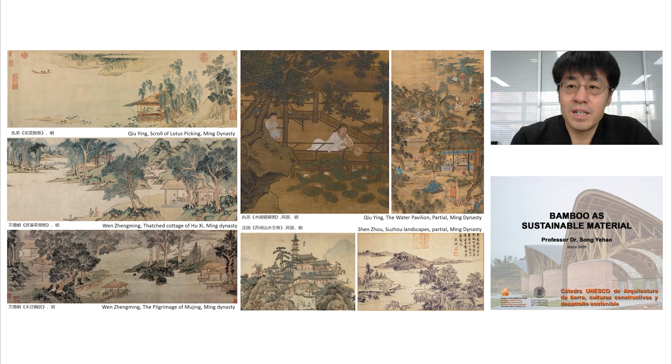Bamboo is very popular around the world. And also for the traditional Chinese, bamboo has very particular meanings, especially for ancient literates. Bamboo sometimes means the virtue of literates. And also we could see some very interesting sceneries in traditional Chinese painting that in old time the envelope of buildings are not so much necessary. The traditional Chinese were fond of the way living together with nature, with openings.

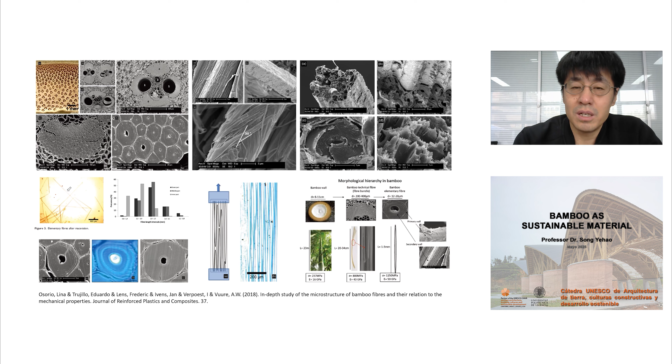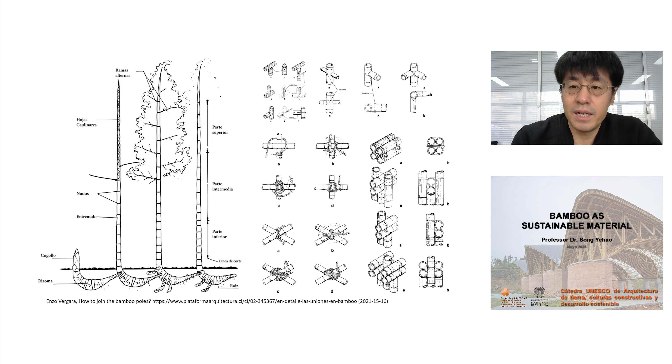The interesting part is all around the world, the traditional way to deal with bamboo as construction material is something in common. People are very likely to use rope to bond different pieces together. Rope plays an important role for bamboo architecture. And also with steel bolts, with help of that, makes it possible to make architecture with bamboo.

And these four pictures show the different stages of my office to use bamboo as architectural material. From 2017 the Village Lounge of Shangcun, and then to the Swirling Cloud in Beijing, and also the tea leaf market of Zhuguanlong in Fujian province, and also the bamboo pavilion for the INBAR organization, International Bamboo and Rattan. And four different stages tell a way of making full use of bamboo as construction material.

From the very beginning with a modular way, because at the very beginning we were not so much familiar with bamboo. We did not so much understand this material, how it could be part of architecture. So we made it modular, so we made something rapidly, six units. And in the Beijing case, we tried to challenge the extreme of bamboo. And also we just focused on the light-weighted structure system with bamboo.

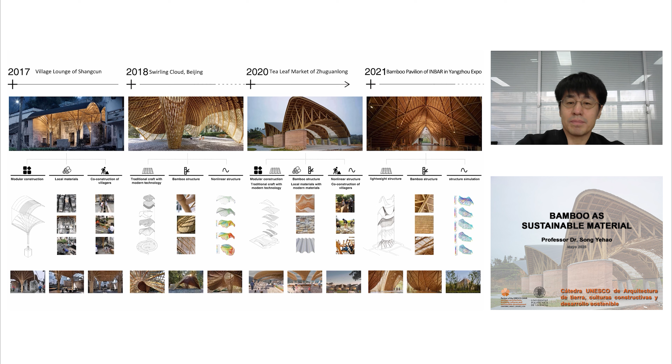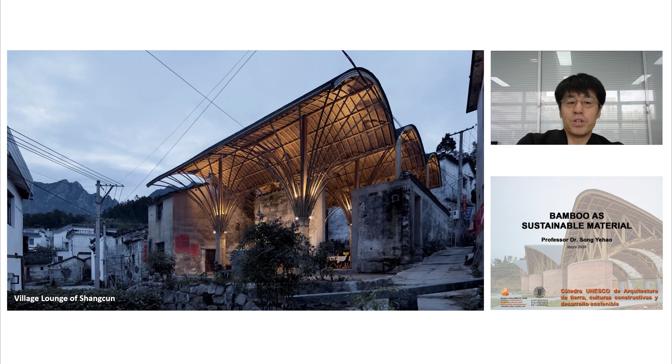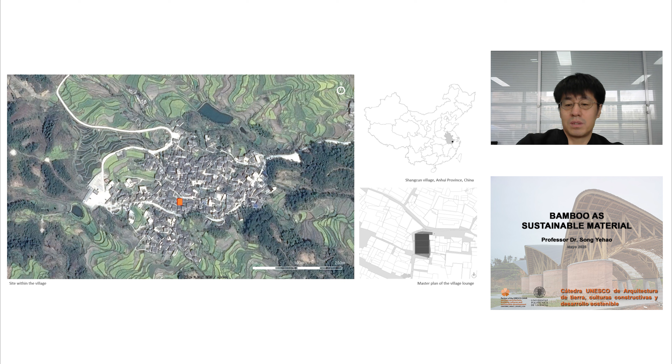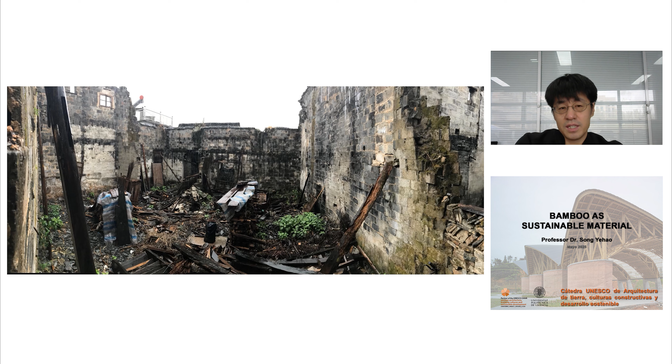At the very beginning, the site is kind of abandoned. The traditional courtyard residential unit, very common in that region, abandoned for two decades and turned to be like that. And after the input of the bamboo architecture, the abandoned place turned to be a new center of the village. There are a lot more contrast, big contrast.

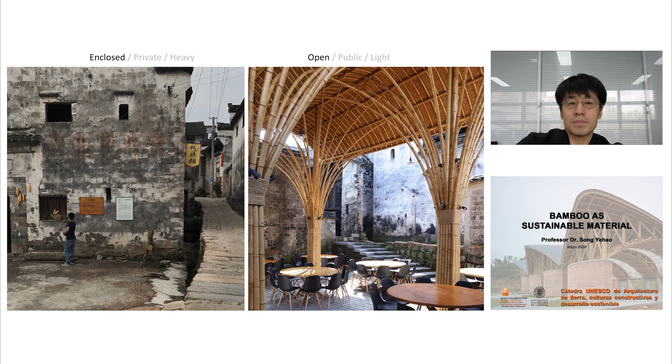The original residential units in that region, called Hui-style residential blocks, were something enclosed. And the village lounge, for sure, is open, not only to the villagers, but also to the tourists, to have the tourists understand what's happening around them. And also for the villagers, they got a place to talk with each other, to communicate, and to share something together. So it's open. And from private, turned to be public. From the private house, residential function, to public, open to all villagers and tourists.

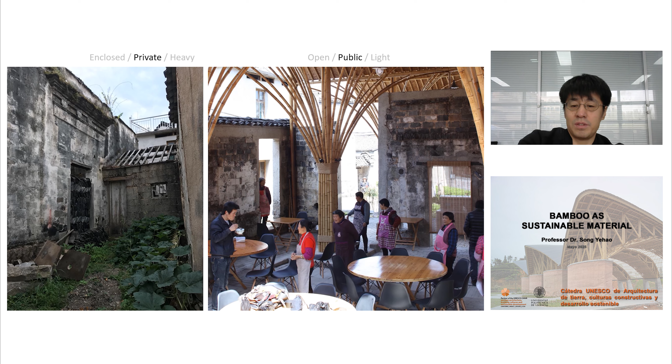And also from the heavy brick work to light-weighted bamboo structure, not only the material, but also the color, from dark gray to light yellow and brown.

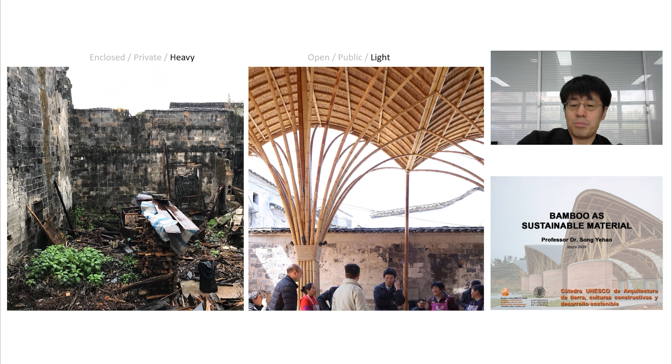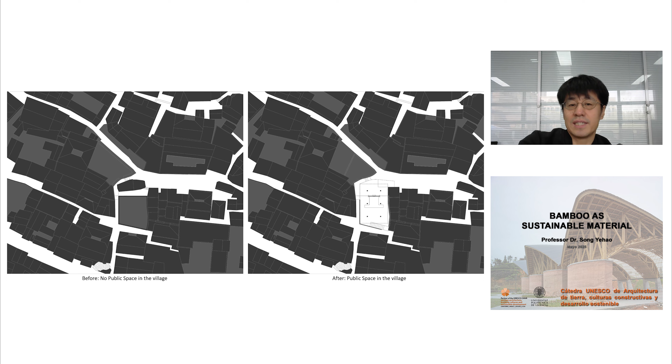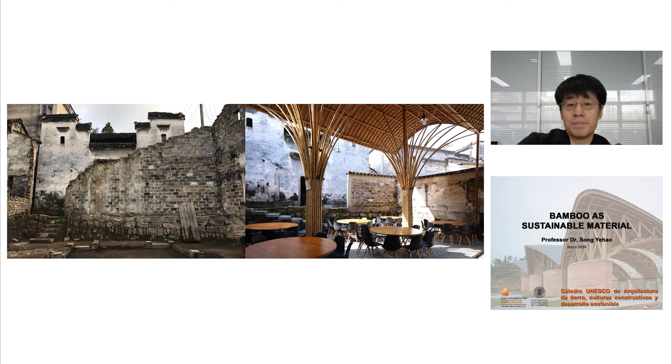So before that, actually no public space in the village. And after that, one center established in that village. So before that, it's kind of a ruined private courtyard house. Afterwards, the renovated new public space for local people and for tourists. We could see the contrast: abandoned place to a new village center. Abandoned, and for the local people.

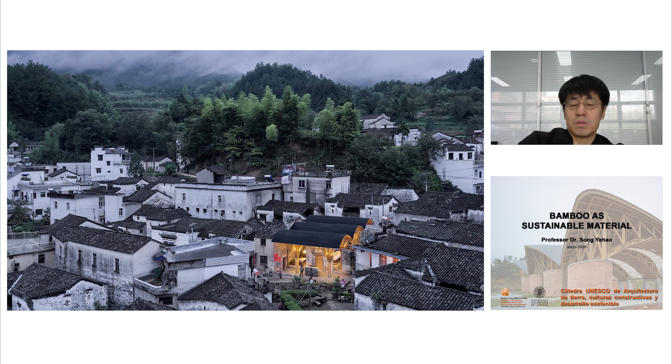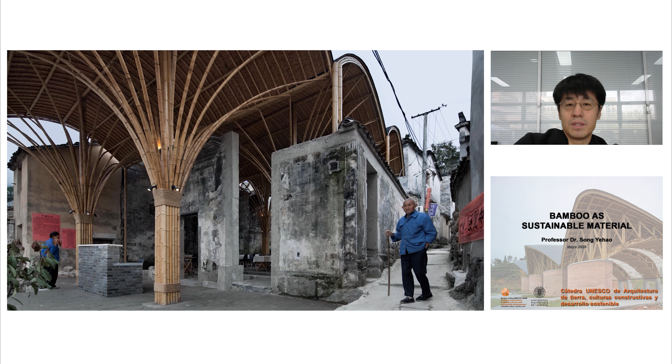Because this architecture was made of bamboo, it's really something new in that village. Also, as I mentioned before, the Chinese ancient or traditional literati valued very much the spirit of bamboo as a virtue of gentlemen, but still very few cases show in architecture people just made with bamboo. We just try to make it modular. 6 umbrellas make the village center. That's in the daily life, the village life.

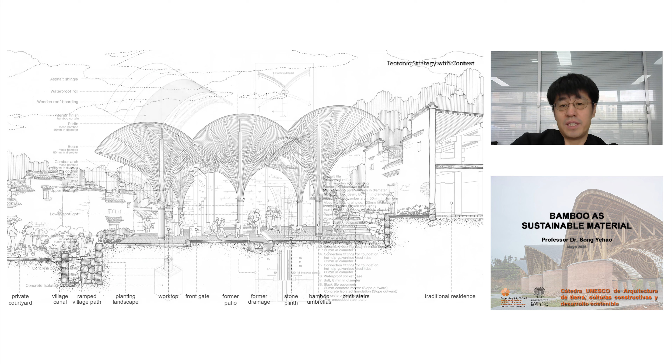The section shows the terrain and also the surroundings. It's something new for sure, but it blends very well with the surroundings, not only because of the terrain, of the shape, of the 6 umbrellas with different heights, but also we retrofitted the whole courtyard system, which is quite famous for the sewage system. That's detailing, bonded with rope, helped with steel bolts, and also with a lightweight concrete base. We just make the whole system.

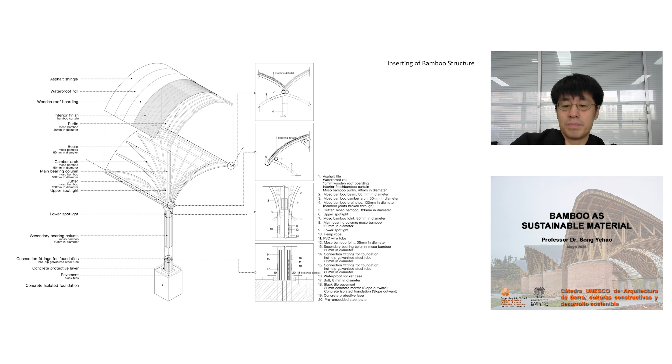People in green t-shirts are professional bamboo workers. Before that, actually, they are also farmers. They are working as the villagers. And just because their hometown is rich in bamboo, and the bamboo industry grows in that region, they just turned from farmers to bamboo workers, professional bamboo workers. And from my point of view, the biggest advantage of bamboo as construction material is it's lightweight, very easy to handle, to deal with, and almost the on-site work is not a challenge.

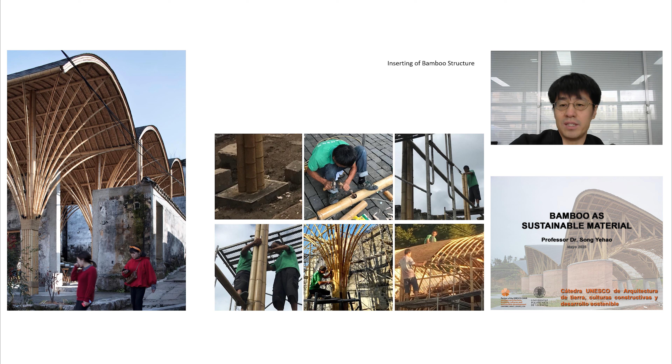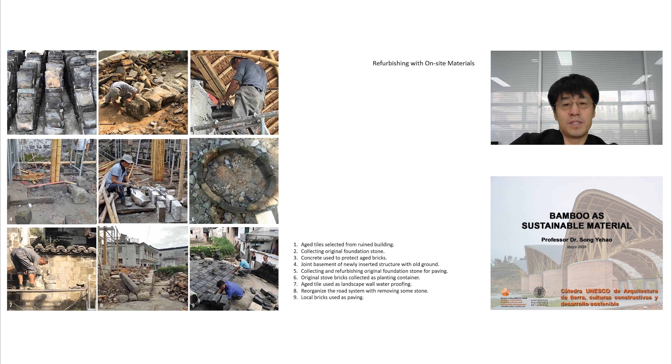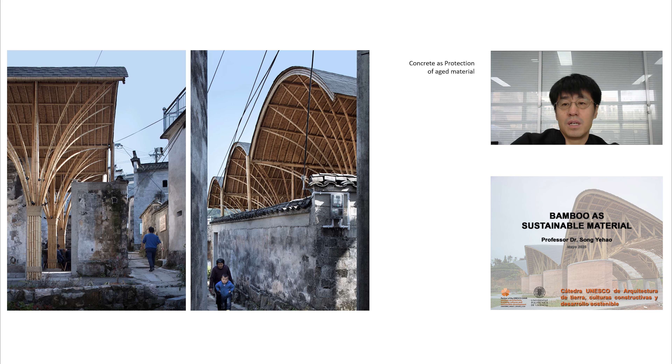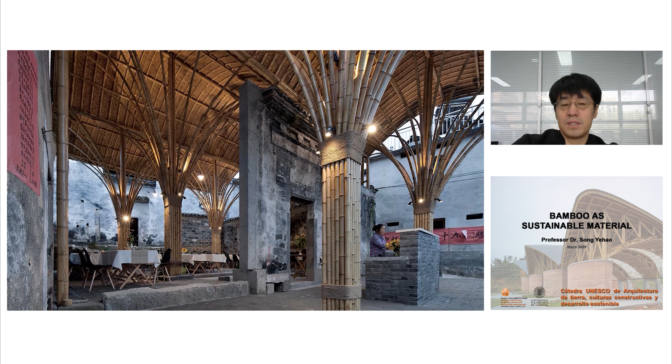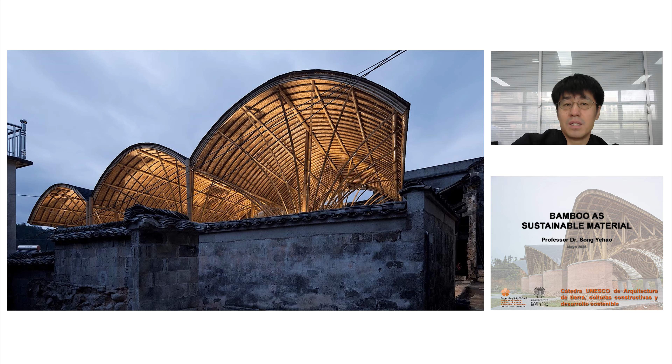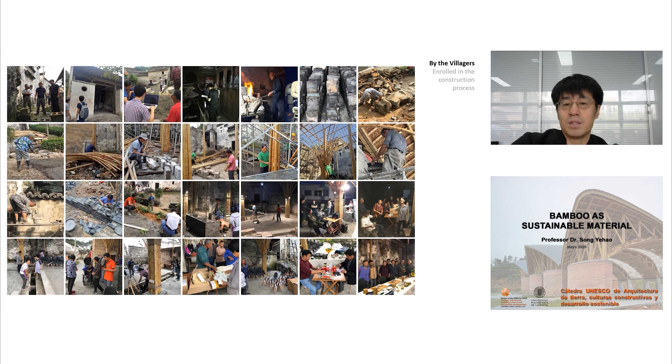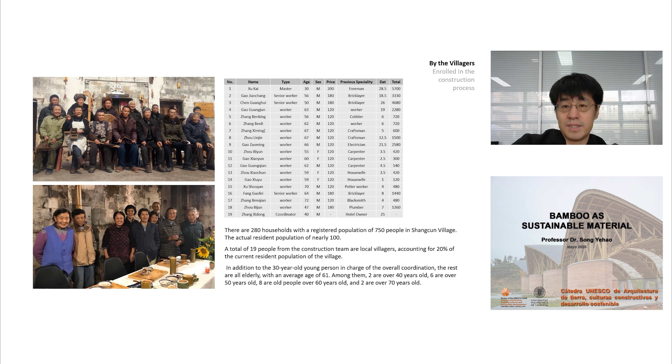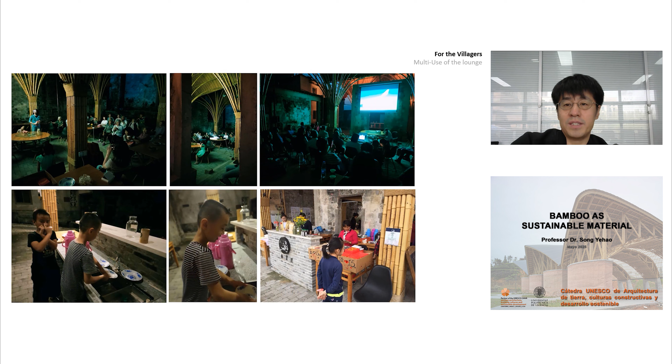Also, the villagers are the owners of that architecture, the small village lounge, because the money came from them. And also the villagers are construction workers, so they work for themselves. And we did statistical research that almost 20% of the local people were engaged in the construction. And also the village lounge is for the villagers. So we try to make the new thing blend in the village, not only from the viewpoint of architecture, but also from the viewpoint of sociologists and also the harmony of the society. It's quite important for a sustainable future.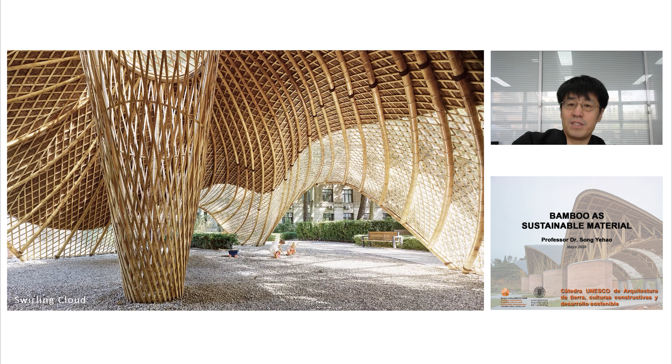The second case is in Beijing. From the first case, we developed a lightweight 3-layer bamboo structure system. We can see from that picture the raw bamboo and the split bamboo net and also the PMMA material as the transparent one and the waterproof material as the opaque one. So 3 layers: raw bamboo, split bamboo as net, and also the layers for waterproofing or just for transparency.

We call it Swirling Cloud because when the sun moves, the shades change, making the scenery like the pavilion is moving by itself. Inside of that, that's a section showing the construction details for the bamboo pavilion, and also some design thoughts to block the noise from outside of the campus wall, from the main street, and also to have a welcome gesture for the people from the main gate, from the T&R building, and also we leave another small gate opening for the bushes and also for the memorial stone.

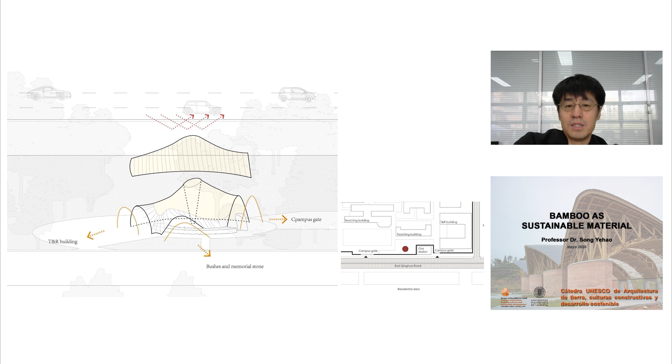So that's the memorial stone, that's the campus gate, the biggest gate, and also the teaching and research building, and also the gate particularly designed for the preserved bushes.

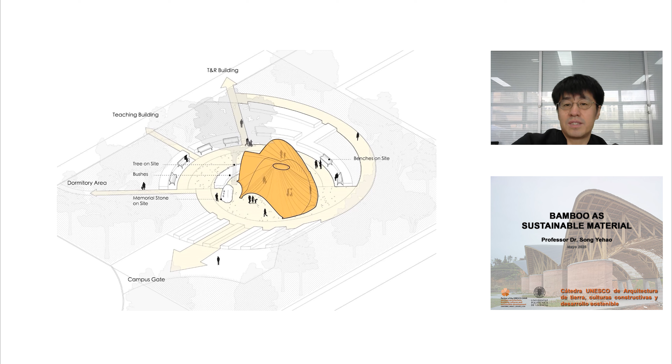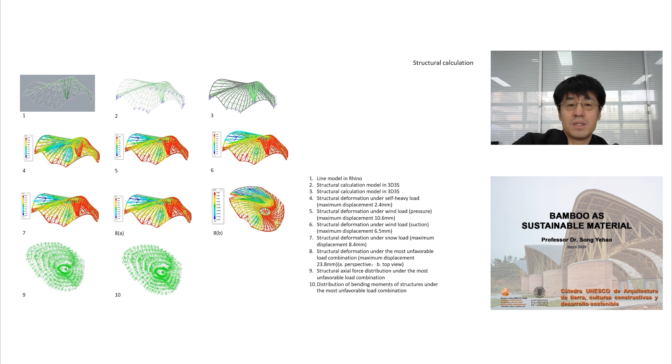We preserve all the plantation at the site, and we also do the structural calculation to make sure the displacement is within the standard allowed by the codes and regulations. So that's the 3-layer diagram.

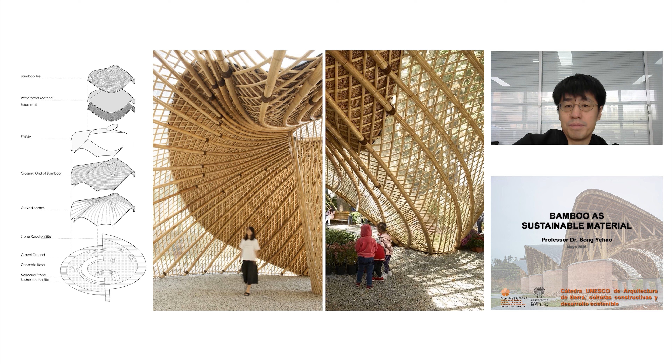We have the beam, the raw bamboo, we have the lightweight split bamboo net, and also the layers above for waterproof or transparent material. So that's on the way of construction. The bamboo splits also worked as the tiles. So that's after construction.

Children are fond of that place. The elderly and also the students and professors around just make it a landmark for the new campus. From that picture, we could see the 3 layers: the single raw bamboo, the bamboo split net, and also the PMMA membrane. The smallest gate for bushes, but also for kids. We could see the 3 different layers.

Bamboo construction is never an accurate system, not like timber construction or concrete or steel structure. It's something not so accurate. So the tolerance for the construction of 3 layers is very important, which makes it possible to follow the design but still not too accurate. We could see the space between the 2 pieces of bamboo is slightly different. That's the nature of bamboo material. Even if you bend it according to your design, it will never be the same as the drawings.

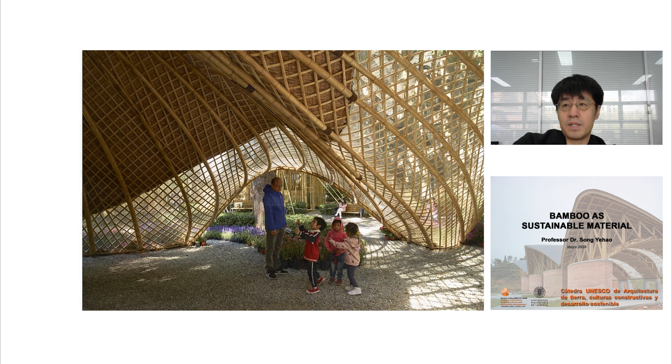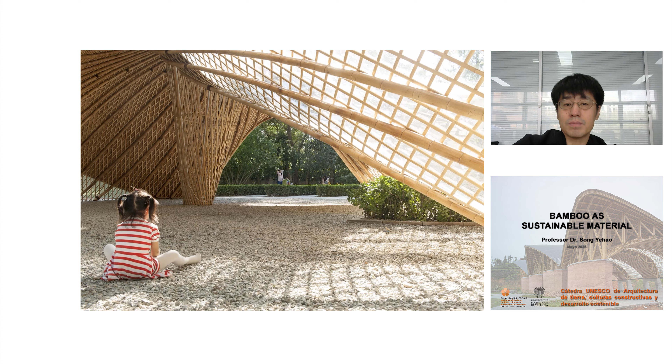And from my point of view, that's another charming point of bamboo architecture, the tolerance. You could tolerate a lot more things. If you made some small mistakes in the construction, the net or the layers above could remedy that. The case is very much like that place.

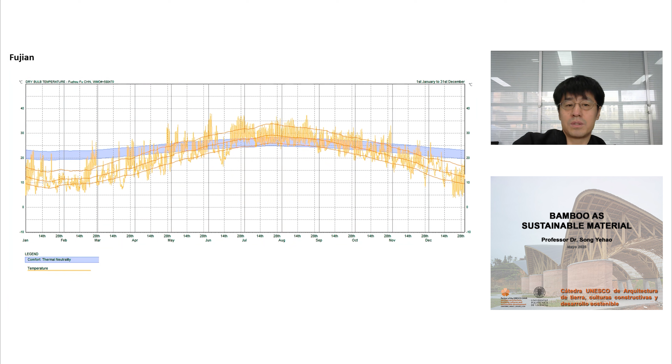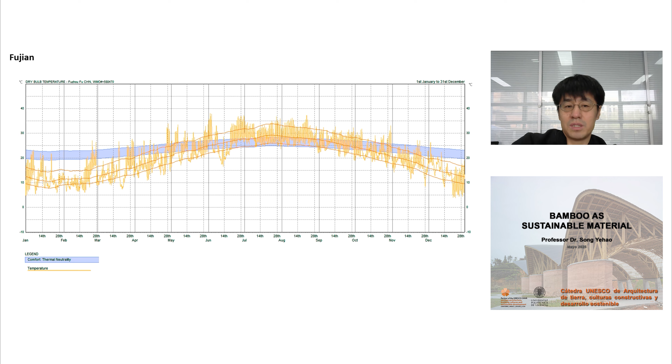The third case is in Shouning, Fujian province. It's a tea leaf market in Fujian. And again the light blue zone is the comfort zone, the same scenario as in Anhui. So it's not too hot in summer and not too cold in winter, which makes the pavilion a space for the villagers, for local people to live in. So that's the location from Fujian to the city, to the county and to the village.

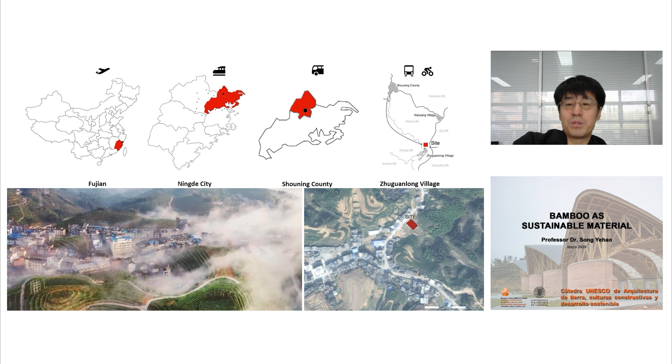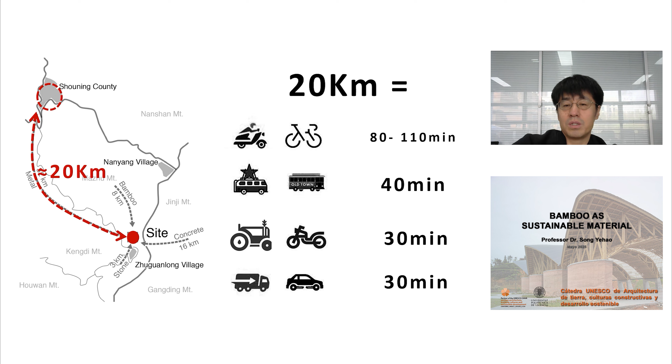We try to make everything happen within 20 kilometers. Yeah, that's also something sustainable. Local materials, local labor, and local resources. Everything from local, so materials from less than a 20-kilometer range. We have tea, we have rammed earth, we have the traditional Chinese timber bridge, all in a 20-kilometer perimeter. The vernacular elements could be inspiring for us.

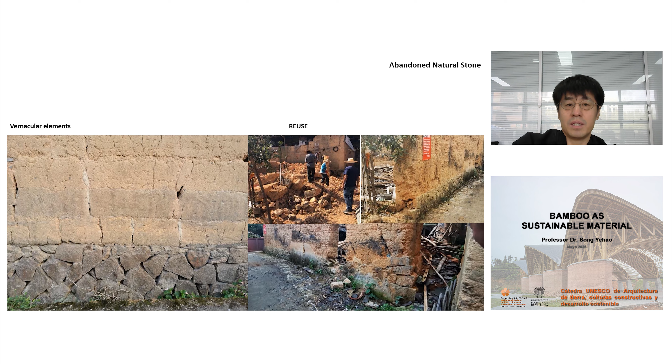The rammed earth, even the stone base for the rammed earth, and also the timber recollected from abandoned old houses. That's the timber. We could say, okay, it's in relatively good quality. Depending on the reuse pattern for the timbers, we just take it for the furniture.

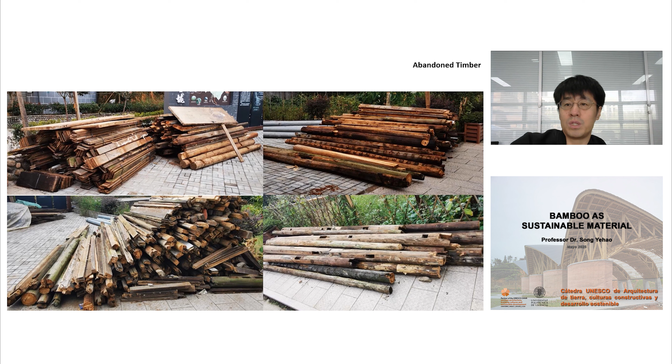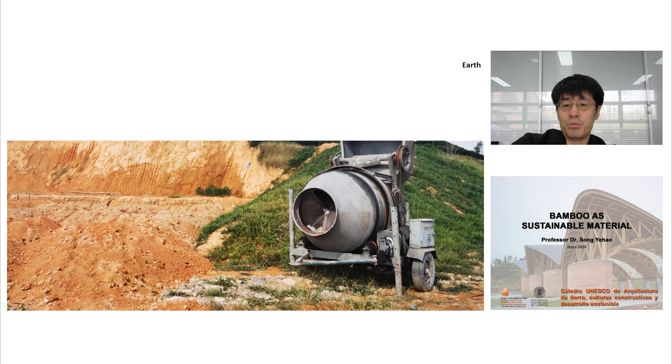And also, Fujian is very famous for its stone resources. A lot of abandoned broken stone plates are garbage. So we recollect them and make them the stone for the terrazzo, for the pavement, and earth everywhere, just on the construction site. We make it again with the wisdom of traditional Fujian people. Also craftsmen from within the scope of 20 kilometers. The bamboo, the joints, the rammed earth, and also

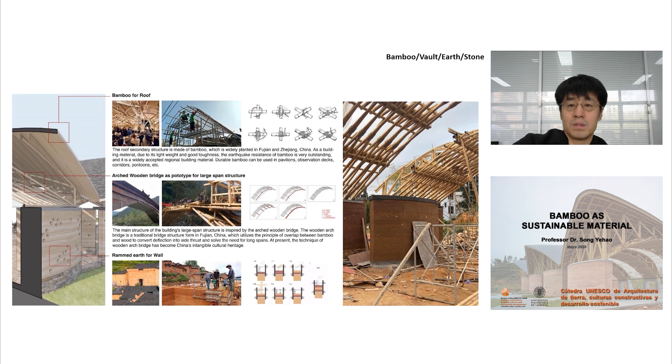all the things. We made this illustration to show the rammed earth and the stone base, and also the bamboo and the PMMA, the transparent membrane, because we try to challenge, in this case, a big span of 18 meters. It's huge. So it could be very dark without a roof window in the middle of the vaulted structure. So we have the PMMA to work as a roof window.

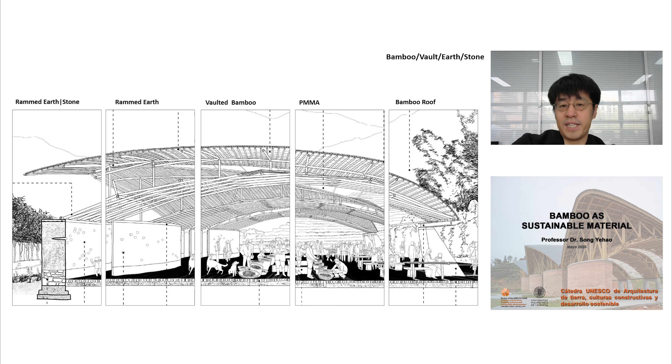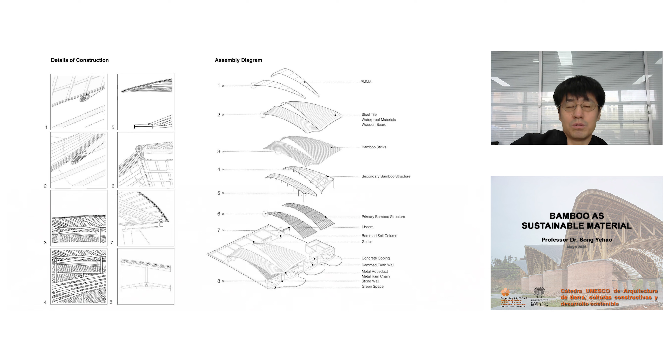So that's the diagram to show the 3 layers: the single raw bamboo structural system, the bamboo split as net, and also the covering, the PMMA or the waterproof material above. So we have a 3-layer system again. And that's the reclaimed stone from abandoned traditional Chinese houses. Again, we just make it work.

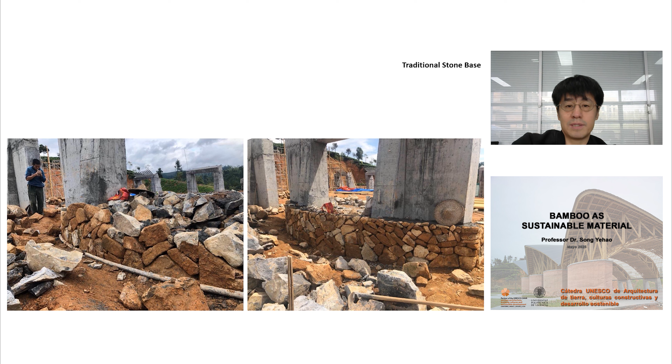And also local people, local villagers: two villagers, two days, a piece of rammed earth wall. The only thing we inputted is the timber brick, because rammed earth is not friendly to nail some poster or to hang something on. But it's in the village, it's something multifunctional, a lot more posters or something commercial, very likely necessary. So we just put some timber bricks in case of hanging something.

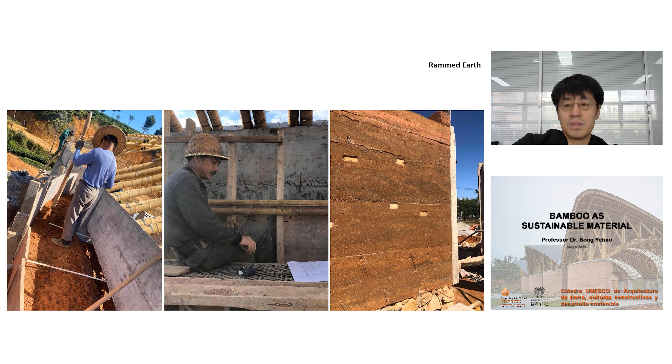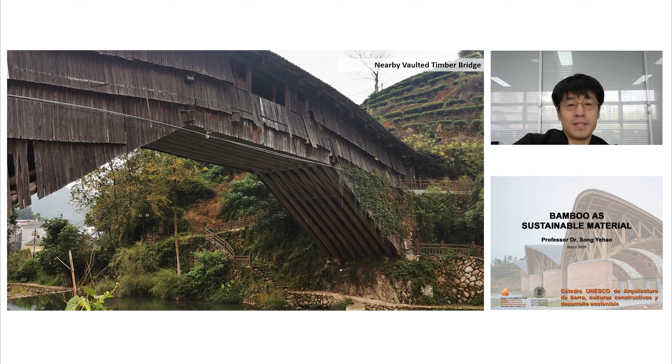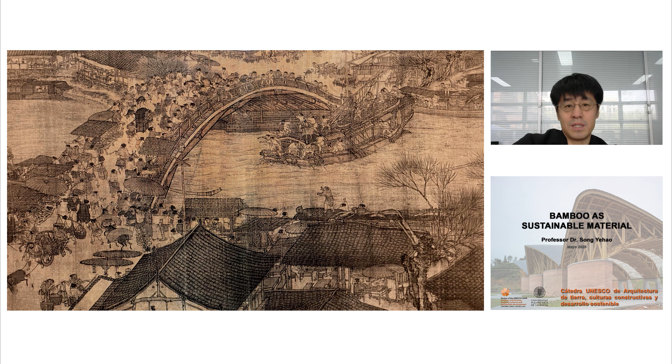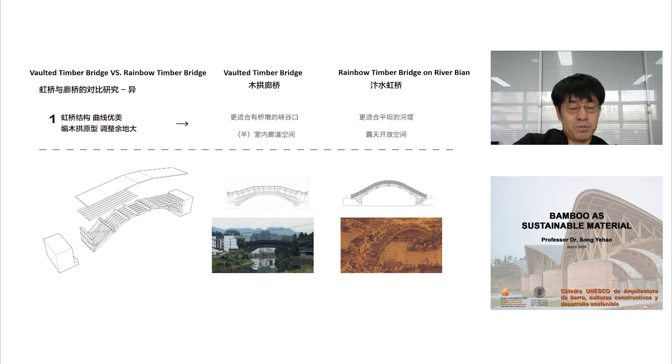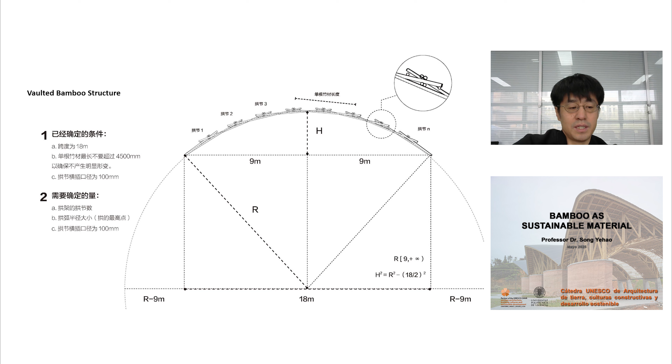So finally, we went with the rainbow vaulted bamboo structure in that case, with a span of 18 meters, and the length of a single bamboo is no longer than 4.5 meters. That's the detailed drawings. And also the diagram shows the joints with rope, the traditional way of doing that. And the detail with help of some steel bolts, with rope, with steel bolts, and with the joints, all the joints done. And also uses the same diameters.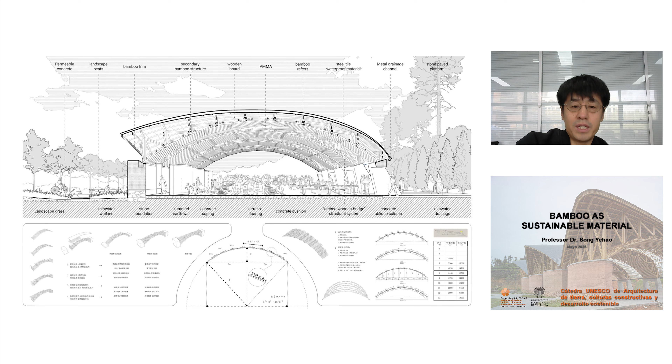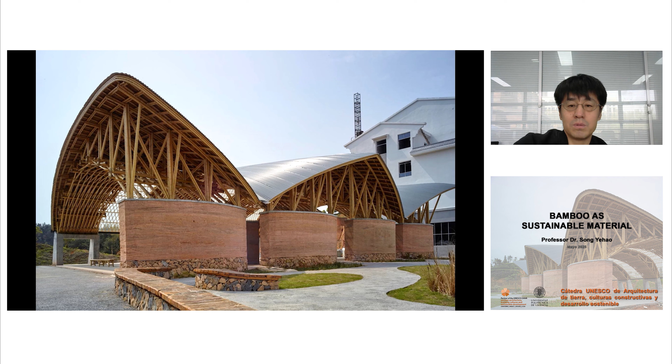For local people, a multifunctional thing is something fundamental for us to do in rural China, because it's not easy for rural China to make a new architecture. So that's a diagram, and that's accomplished. Reclaimed timber as benches for landscaping. Rammed earth wall, reclaimed stone as base. Well, that's showing the lighting. It's very bright in the middle of the big construction. Without the transparent PMMA material, it's impossible.

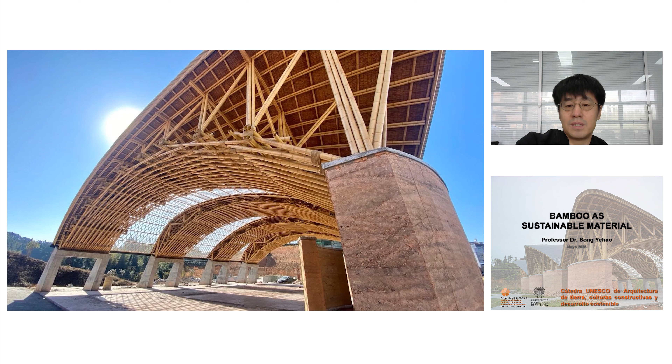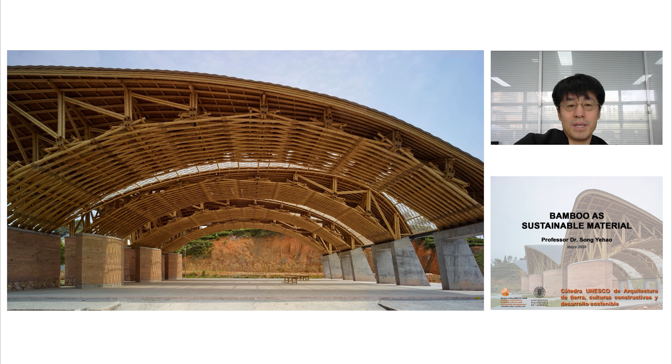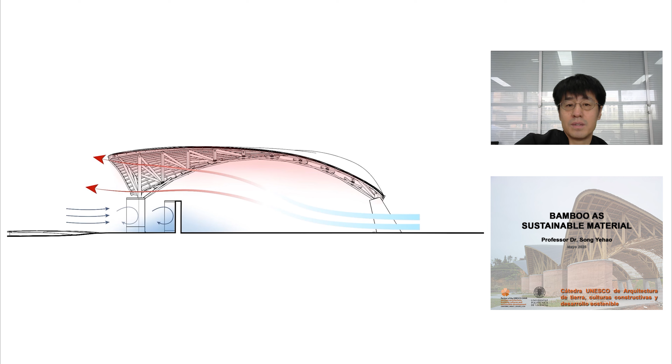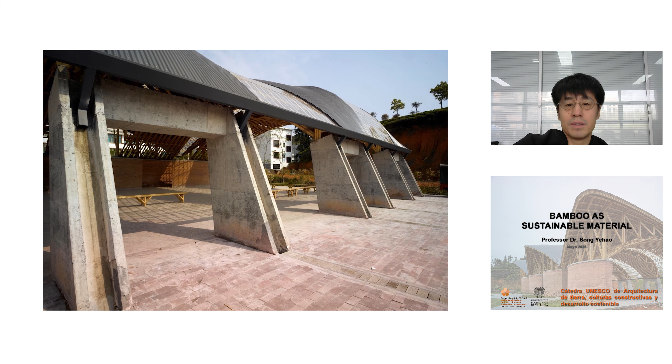That's a structure. Or the terrazzo, the broken, abandoned stone plates for the terrazzo pavement. That's a diagram to deal with the local climate, to block the cold winter prevailing wind, and to have the prevailing wind from the south. The terrazzo. There's also another pavement with abandoned, broken stone plate. Rammed earth wall with timber bricks. That's a detail of the ropes to bind different pieces of bamboo together, in a traditional way. That's the benches with abandoned, reclaimed timber.

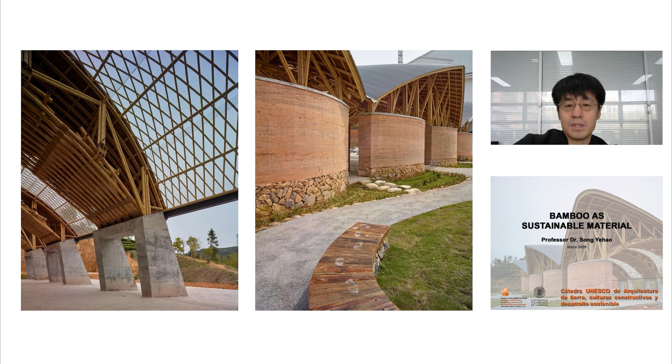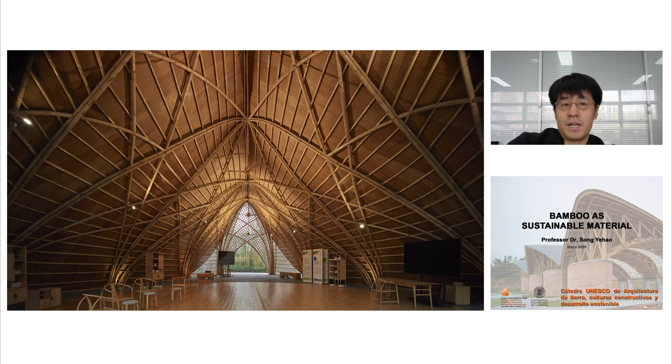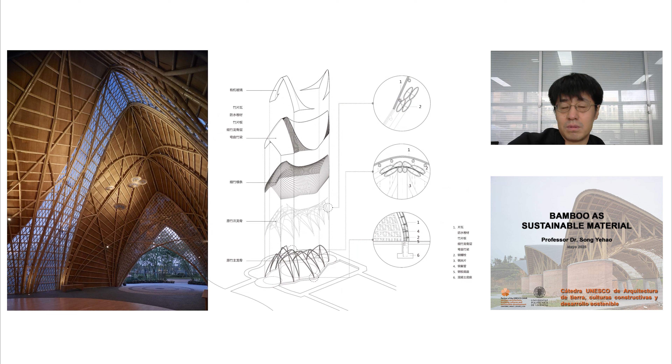The last case is in Yangzhou. It's a pavilion, and we make full use of all the experiences, for instance, the three-layer lightweight structure, the PMMA materials, to make it an exhibition pavilion or just for events. It's also lightweight. From my point of view of research with bamboo, durability is not about the structure, but bamboo itself. So we try to use as little bamboo as possible to cover as big a space as possible. We did different schemes and analysis of the structure system, and finally found the main structure and the three-layer system again: the raw bamboo, the split bamboo, and the waterproof transparent roof cover.